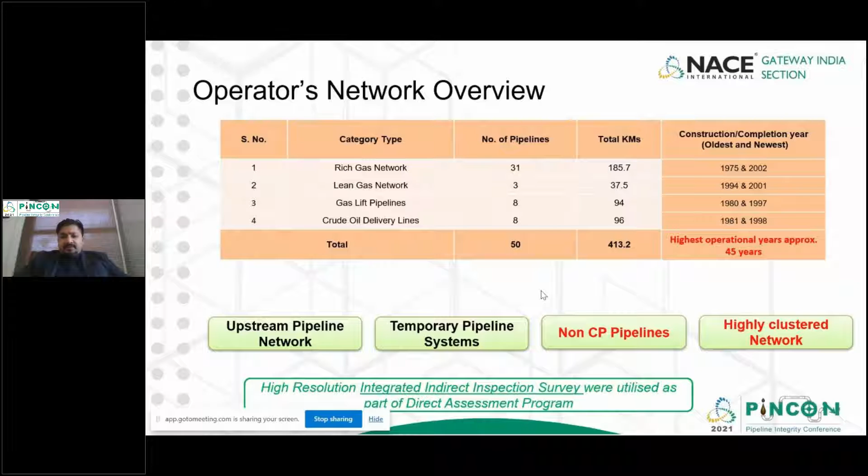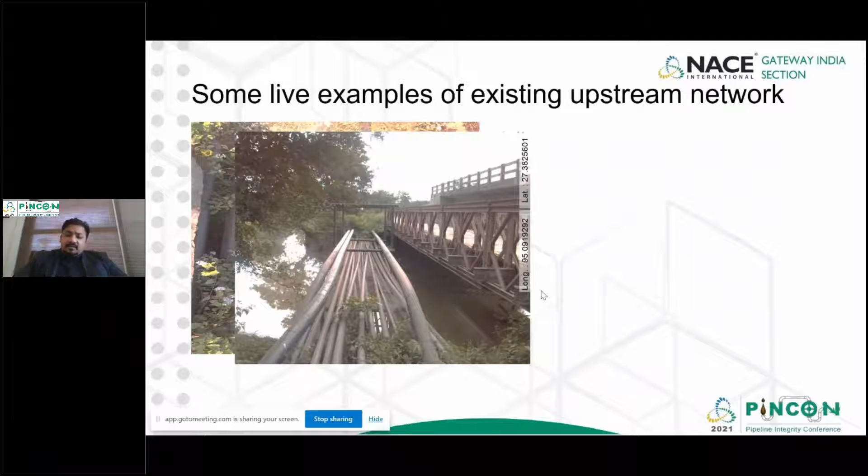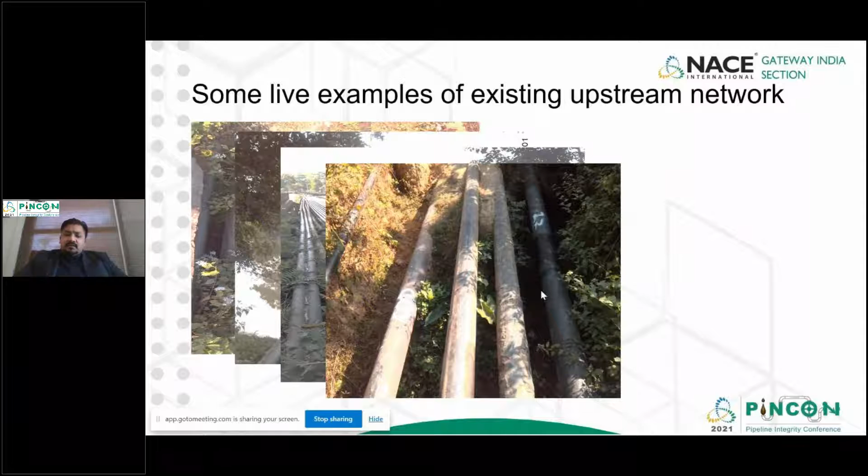One more example of this. Sometimes the pipeline comes above ground on its own and then goes underground again, something like what we're seeing here. This is because the soil in that area has subsided, or maybe general erosion of the soil has occurred due to a lot of precipitation in the area.

Again, some examples like this - some of them could be such a case that one pipeline within that whole bunch was laid maybe 2 years ago, and another pipeline was laid maybe 30 years ago. So that could also be the case in this area. Another photograph of our guys doing the survey.

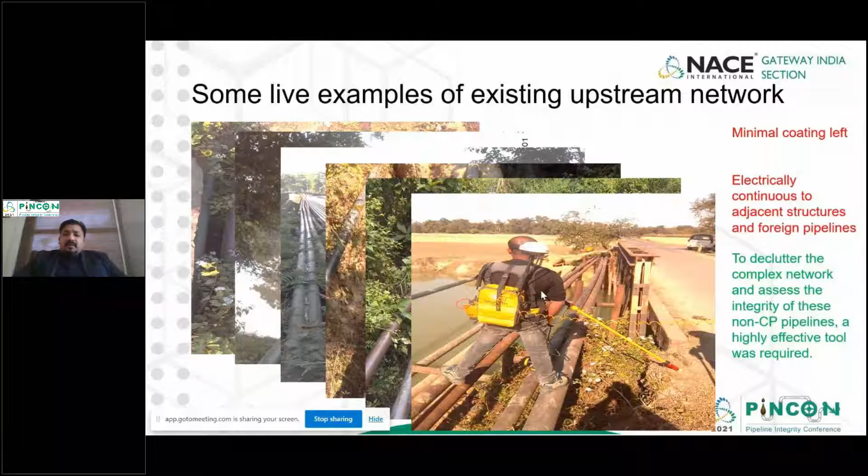What are the key properties of these lines? Minimal coating left, not designed to be CP protected, and because they are all together and touching each other with no insulation joints at the stations, they are all electrically continuous. To actually assess the integrity of such pipelines, whoever the contractor is, they need a tool that can isolate these pipelines from each other, so each can be identified and assessed accordingly.

What are the different surveys used during this indirect inspection survey? During this process we use a technology called XLI in this particular project. That's how we do the survey with two guys side by side, parallel to each other - one guy has a line locator and a GPS backpack, and the other guy has the probe for recording all the readings.

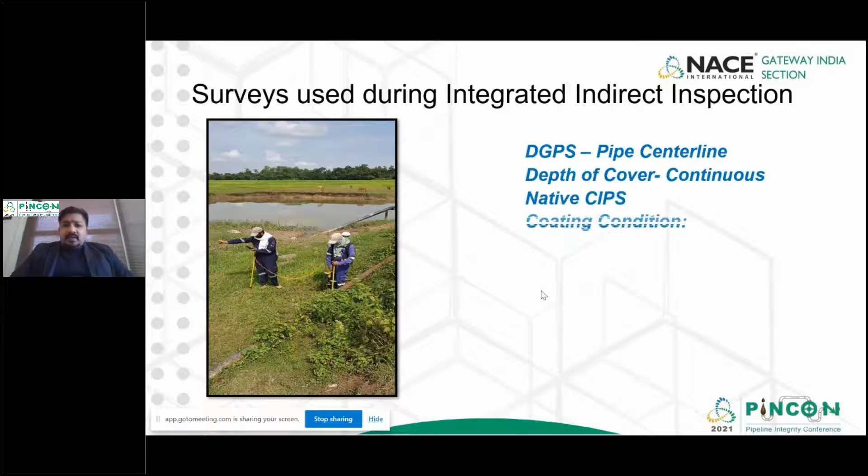These are all the items being collected at the same time in this particular case. So we have to collect all of them to ensure we have enough data to assess integrity at the end of this program.

So we are collecting GPS, we're collecting continuous depth of cover, which is also very important for ICDA programs. We're collecting native CIPS, not normal CIPS. Normal CIPS would have been in the case of CP protected pipelines. But in this case, we are collecting what the native potential is of the pipeline - what kind of potential the line is seeing from the environment as it is, without any in-place impressed current cathodic protection or sacrificial anode cathodic protection system.

We're not doing any DC kind of survey. We're not doing DCVG. So we're doing ACCA in place of that, as well as ACVG.

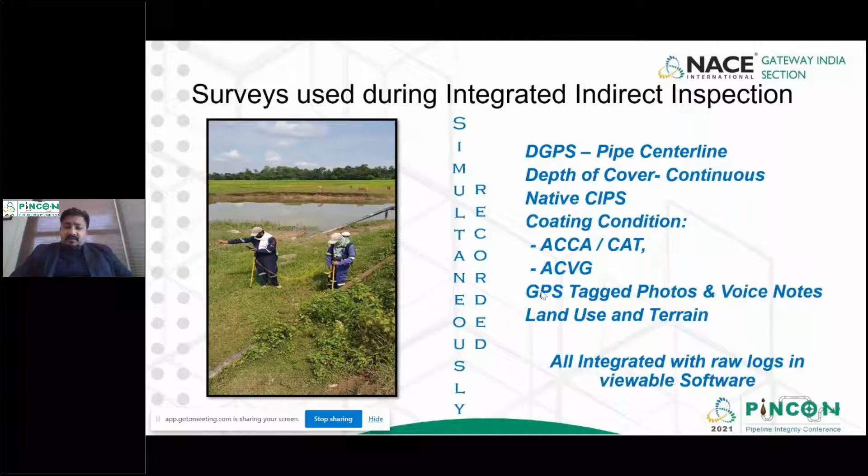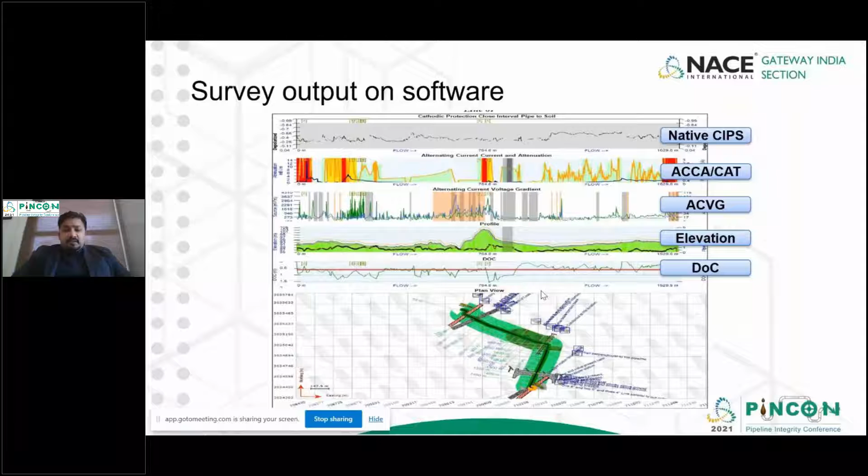The survey, after we complete it, this is how it looks on the software, and these are the different data sets that we collect at the same time - it's aligned automatically. So we get native CIPS, we get the CAT data, we get the ACVG data, we get the elevation data, we get the depth of cover continuous data, and of course the plan view with all the lat longs and everything.

What that does is, after you finish a survey like this for many of these pipelines, which we have done in this particular case - imagine the kind of pipelines we just saw a couple of slides ago, when all of them are touching and crisscrossing each other - finally you get to a point where we can isolate and map them like this. This is an operator's dream come true for such a case. Having this done for non-CP protected pipelines, in a situation where all the pipelines are touching each other, is quite a unique feature that takes a lot of time and effort, but it can be done if the right technology is deployed.

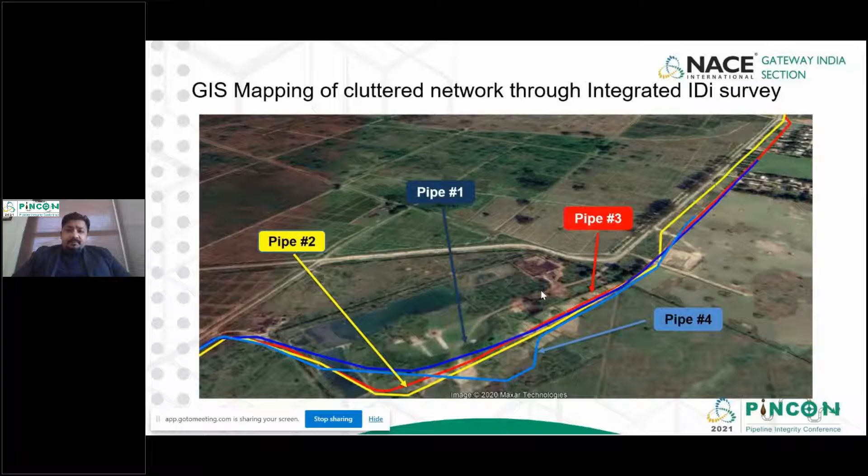So we'll be talking about the results of this kind of survey that was deployed for this program. We'll be talking right now of the readings, as well as what was actually found during the inspection, the verification inspection process.

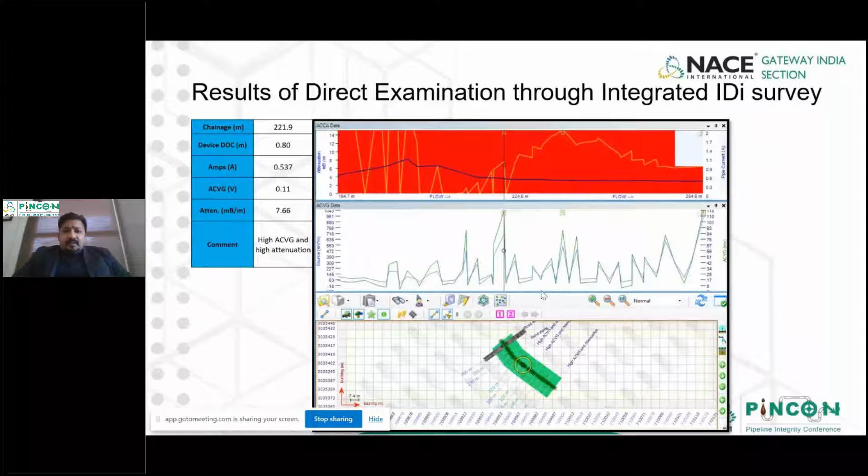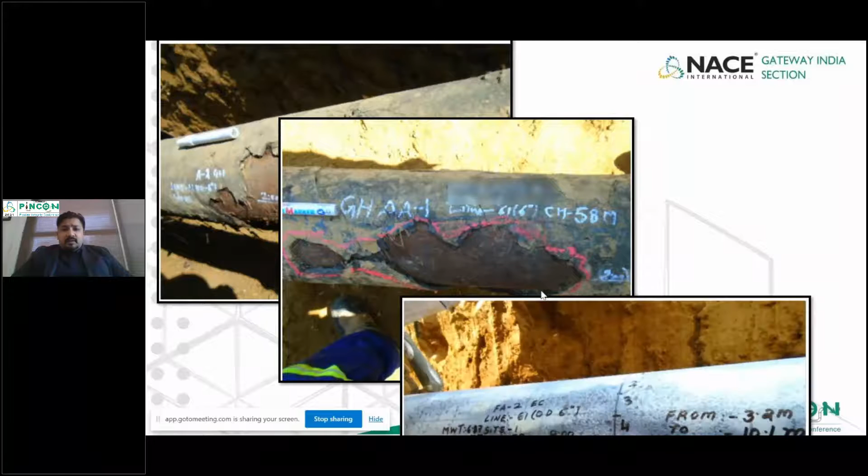So this is one location at 221 meters. We have high attenuation and a peak ACVG fault as shown there. And this is how we see it in the field - we see a coating holiday, another coating holiday, and underneath the coating holiday we are seeing a lot of external corrosion, pitting external corrosion. So we're actually finding corrosion from these kind of surveys.

If you see from the NACE perspective of the NACE ECDA standards, any of these above ground survey technologies are not directly supposed to be finding you external corrosion. They're supposed to be finding you indications. What is an indication? As per NACE, an indication is anything out of the norm which is picked up, which is electromagnetic in nature, and is picked up by the above ground survey done earlier. But in this case, we are pretty lucky - we found holidays and we found associated external corrosion along with the holidays, and we could categorize them accordingly, which is quite a successful process during this project.

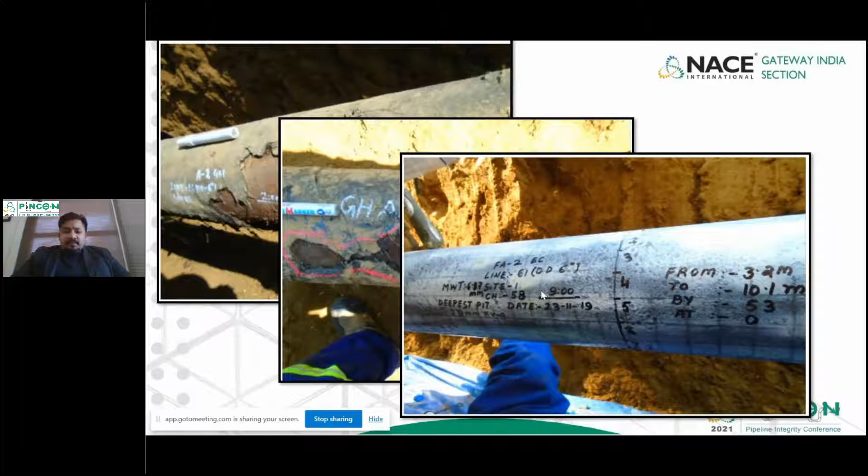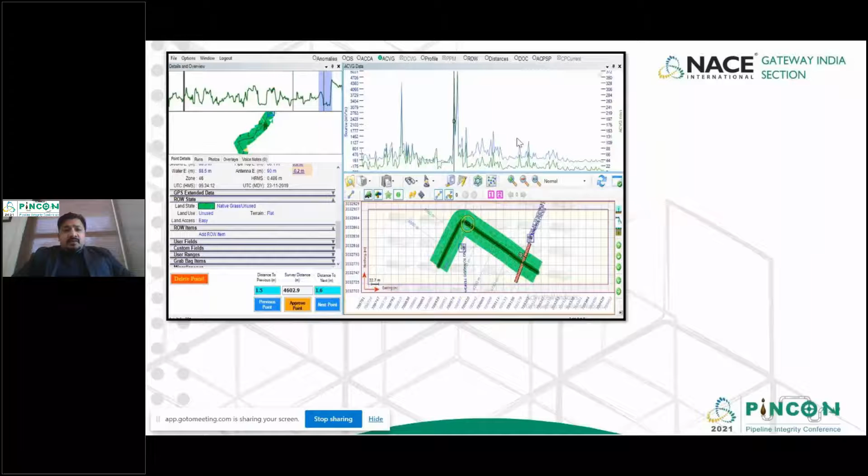Another example is we see an indication which has been ACVG flagged - this is quite startling even for us, even though we've been using this technology for quite a while now. We find a welded plate which must have previously been a repair in this area. If you can see where my mouse is, another holiday and long holiday.

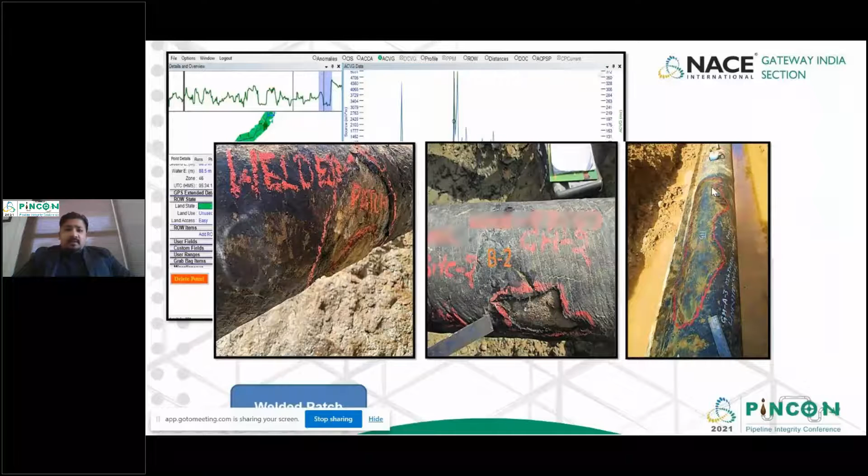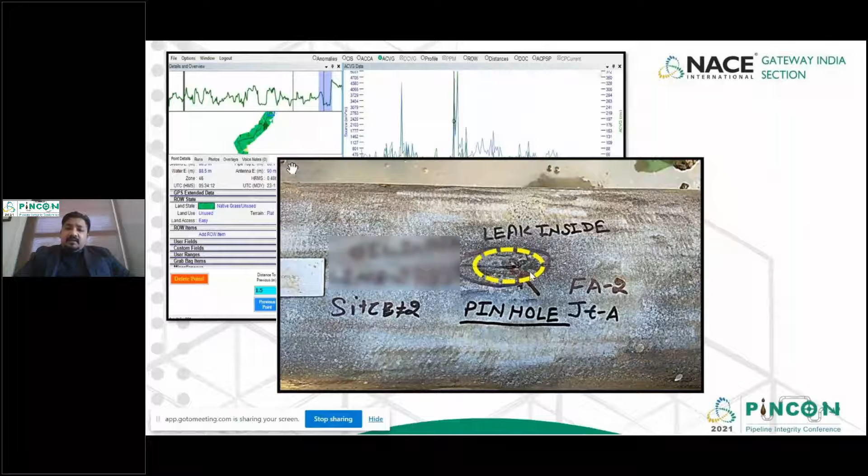Additionally, we are also finding a leak. This was a live leak. After we removed the coating at that particular site, we actually find a leak, and we tested this with bubbles to see that the leak was outgoing in that particular case. We actually stopped a catastrophe in that area because we found a leak by using indirect inspection technology. That is quite something, because again, I would like to reiterate - we are not supposed to be finding leaks through indirect inspection technologies.

DA as a technology is meant for finding metal loss. It is not meant for finding leaks. But sometimes the data connects and it does make sense. The science makes sense, and we end up picking up the right location for finding leaks like this.

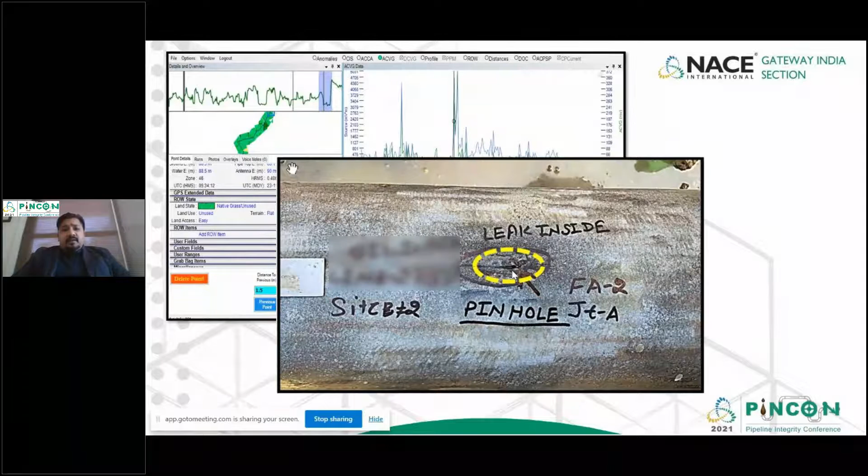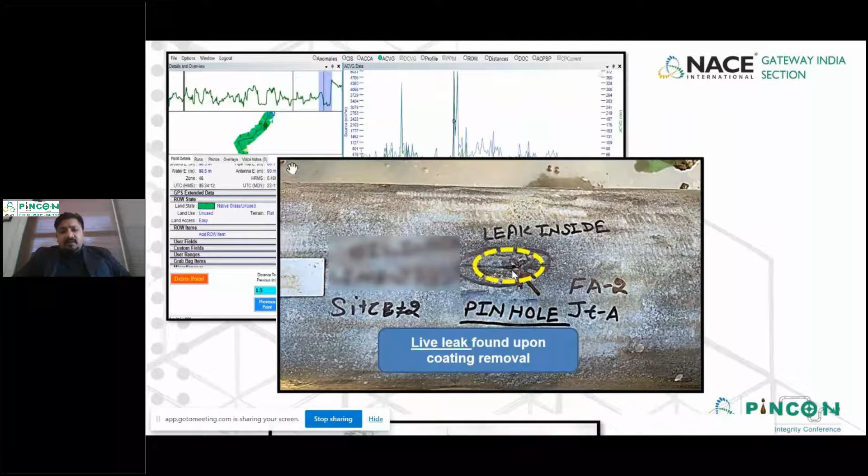In another location, we caught an indication which was flagged as a coating anomaly by ACVG. But of course, when you do the excavation, we see it was not exactly a coating anomaly. It was a coal tar coated pipeline, and there was a clamp where there had been a leak before. The client had repaired the leak using a clamp, and the clamp was left bare. Therefore, our technology, the machine that we had deployed, saw that particular bare clamp as an indication which got flagged during our data assessment, and therefore could catch it.

This is again something quite amazing, because even for us, having done this kind of survey for a long time, it's difficult to see something like this using indirect inspection technologies.

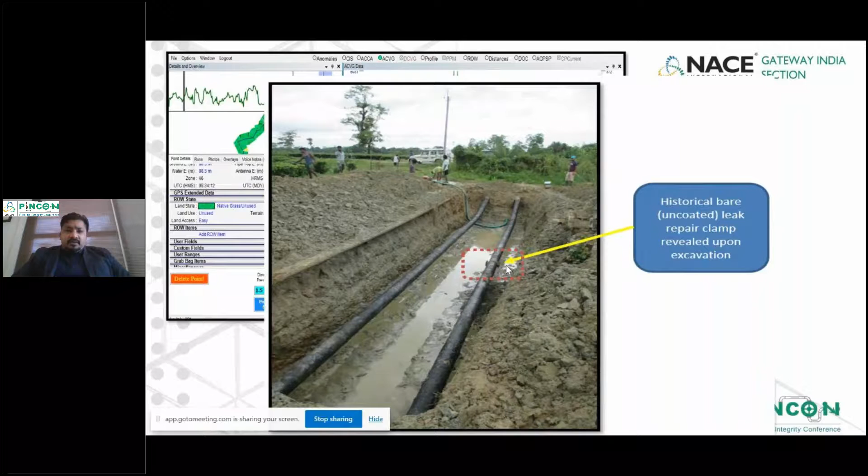This is another example. We see a coating holiday. What we're trying to show is, you see a holiday like this, and you open up the coating, and then you see that the coating is moving away from the pipe, which is known as disbonding. The coating is moving away because of disbondment, and you know why it is disbonding - it's because based on the holiday, the area started corroding. So the deposits have caused the coating to be disbonded off from the pipe, so that the coating is just sitting on the pipe, but it's not exactly adhered to it.

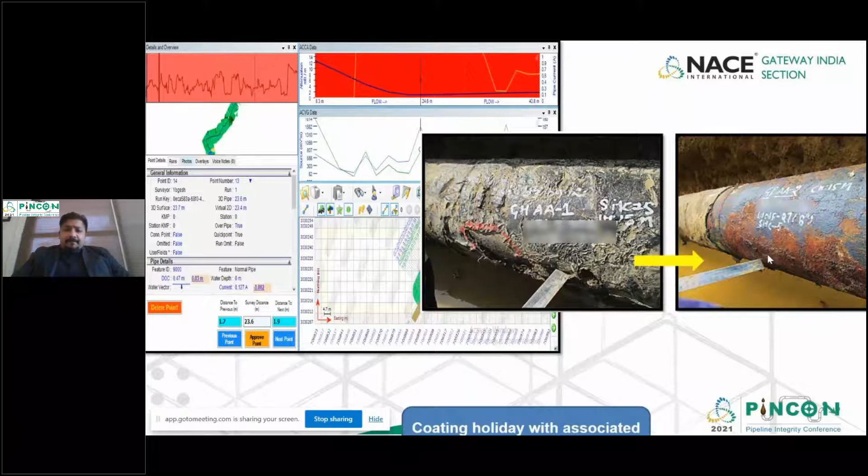This is another example, another case. In these old pipeline systems I'm talking about, where some of the pipelines are more than 45 years old, some sections, because of previous historical problems, were replaced. And now that the industry has moved on to 3LP type coating, those replaced sections were 3LP coating. Even though the pipe material is the same, the coating is different. The original coating was coal tar, but now the replaced section has been 3LP.

But even in this area, we could still see holidays, and something like this was caught. If you see the attenuation in the area, it's less compared to the coal tar attenuation we saw earlier, a couple of slides before this. This makes scientific sense as well, because the 3LP coating is in place exactly - it's not degrading like the coal tar coating is. Plus, we know it's new coating, therefore it's not supposed to be losing out on attenuation.

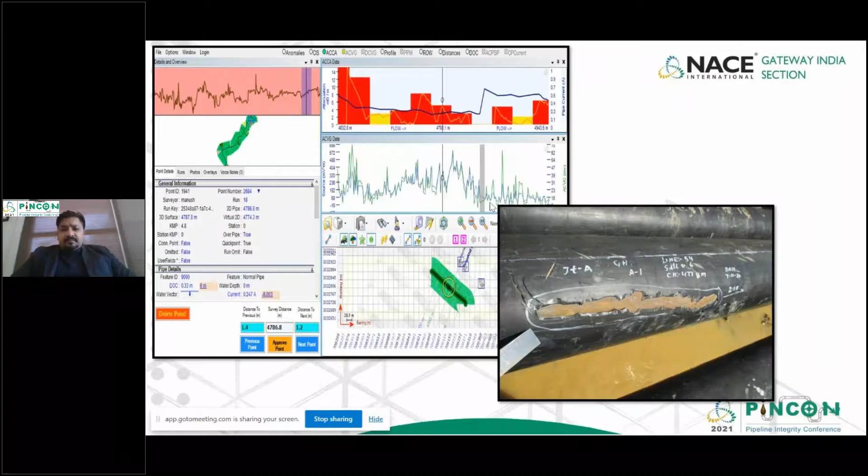But still, there was a holiday which was most probably caused by a third-party defect or something, and which was caught by the program. We had removed it and also checked for disbondment, which we found a little bit of, even though this replaced section was only 2 years old.

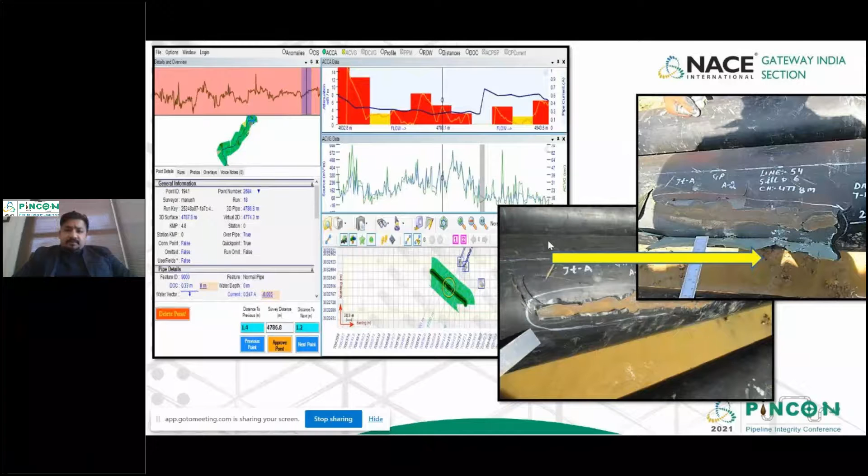This is another example that we're talking about. In this case, it's moderate DOC - depth of cover is less, which is what it means. Minor ACVG and no attenuation.

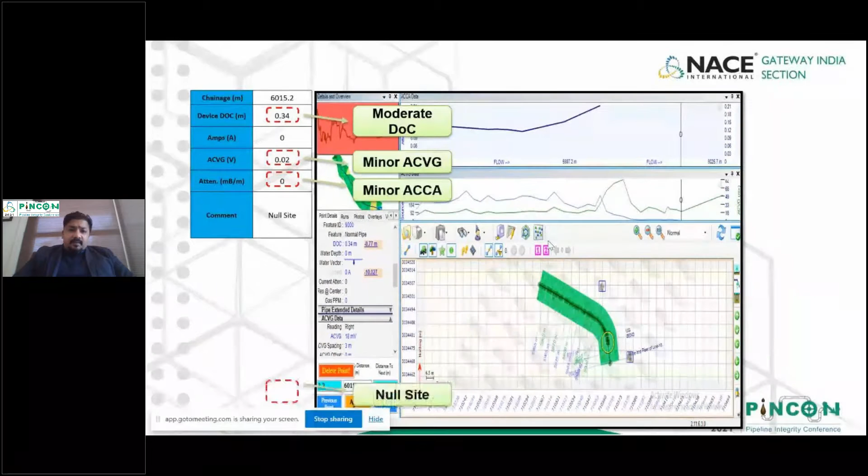What we're trying to show the audience here is whether this program will also work for a location where there is no indication, to prove the kind of a null site per se, because we have to also show that if the technology is not catching something, does it mean we are missing something? No. So just to prove that, we've got this slide in, and this is what we're going to talk about. This was in particular a null site, and after excavation, that is what we find.

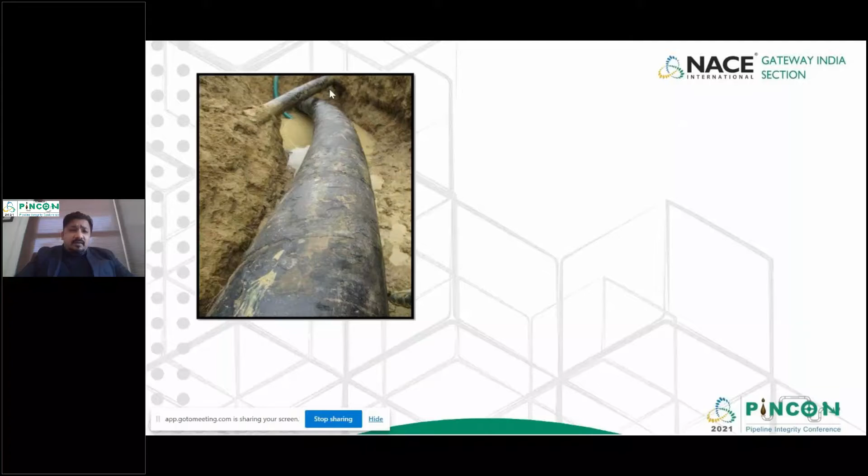We find perfect coating in the area. There was one pipeline crossing on top of it, and we see that the subject pipeline which was being surveyed did not have any coating anomalies, nor does it have any problems. Although the pipeline on top, the one which is crossing, had a couple of coating holidays, and most probably the ACVG minor indication that we got in this location could have come from this crossing pipeline, over our subject pipeline in this particular case.

So this was quite impressive, and with this, I come to an end - when you do such niche, old pipeline systems, and when your pipeline system is critical to be assessed, you might require additional indirect inspection technologies. You cannot just hope that two will do it for me, or one will do it for me. You'll have to go for maximum resolution, which is the subject of this presentation.